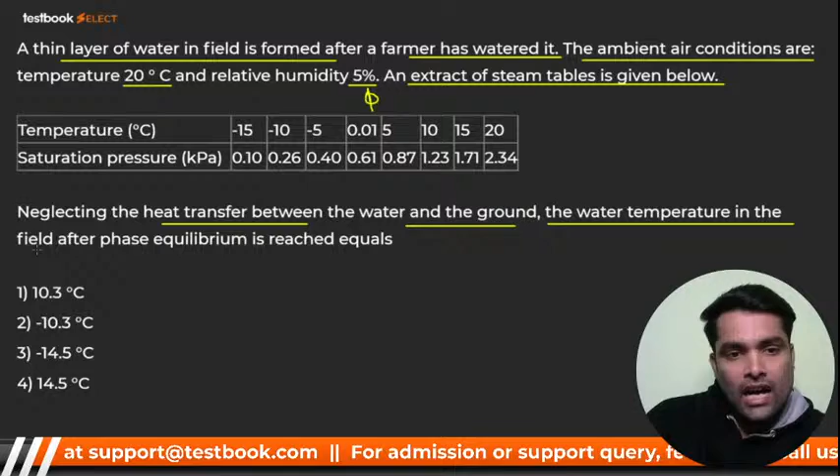Neglecting the heat transfer between water and the ground, which is almost 0, find the water temperature in the field after phase equilibrium is reached. We have to find the temperature corresponding to PV. That means they are asking for the temperature equivalent to the vapor pressure.

Now listen carefully. You know that phi is equal to PV upon PVS, right? So from here you will get PV. Phi is 0.05, PV we have to find out, and PVS corresponds to a temperature of 20 degrees centigrade.

So we look at the table at 20 degrees centigrade, and the corresponding pressure is 2.34 kilopascal. So from here you get PV, and PV becomes 0.117 kilopascal, right? 0.117 kilopascal.

It is 0.117 kilopascal. So here I can write 0.117 kilopascal, right? But if you observe the table, you are getting 0.10, you are getting 0.26, right? Means in between these two values of pressure, we have the value 0.117, and corresponding to that we have to find out temperature. But here they have not given it directly. So what we'll do? We'll do the interpolation.

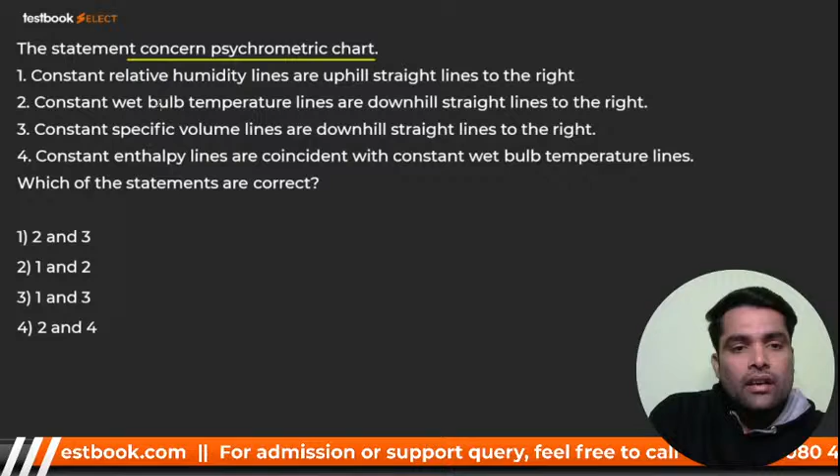The statements concern the psychrometry chart. Constant relative humidity lines are uphill, straight lines to the right. Constant wet bulb temperature lines are downhill, straight lines to the right. Constant specific volume lines are downhill, straight lines to the right. Constant enthalpy lines are coincident with constant wet bulb temperature lines. Which of the statements are correct?

Guys, be fast. कौन सा correct होगा? बच्चा पार्टी, be fast, my dear. Which one is correct? Yes, WBT lines are not coincident, right? Coincide नहीं करती हैं वो. Okay, so my dear, now you tell me.

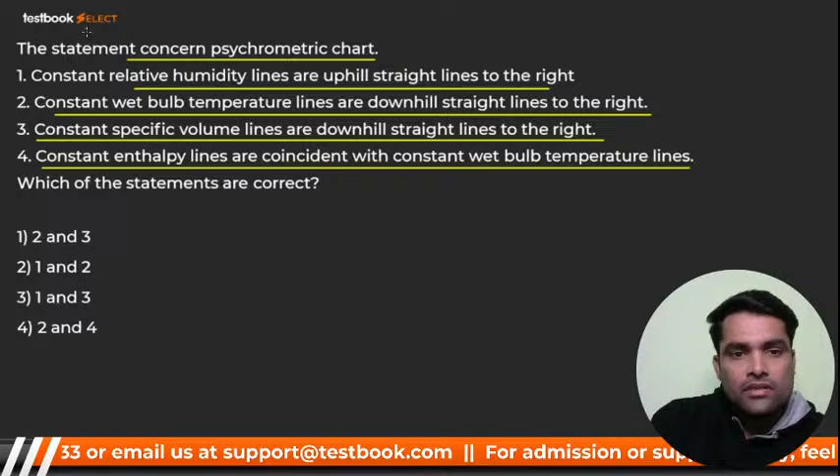Some people have confusion about this line. So I want to tell you, enthalpy lines are uniformly spaced. WBT lines are non-uniformly spaced, so definitely they will not coincide, right? But I can say that constant wet bulb temperature lines are downhill, straight lines to the right. It's correct. This one and this one is correct, my dear. This is nothing but a psychrometry chart, if you remember. 2 and 3.

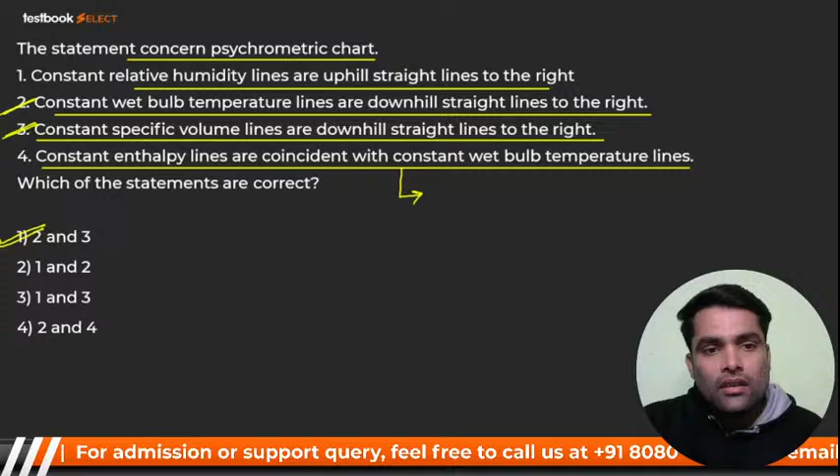No. That's why I say Vamshi Krishna, it's not like that. Krishna, listen to me. Because WBT lines are non-uniformly spaced, whereas enthalpy lines are uniformly spaced, so definitely they will not coincide. So 2 and 3 will be the most correct option, right? I hope you got it. Here I go for next.

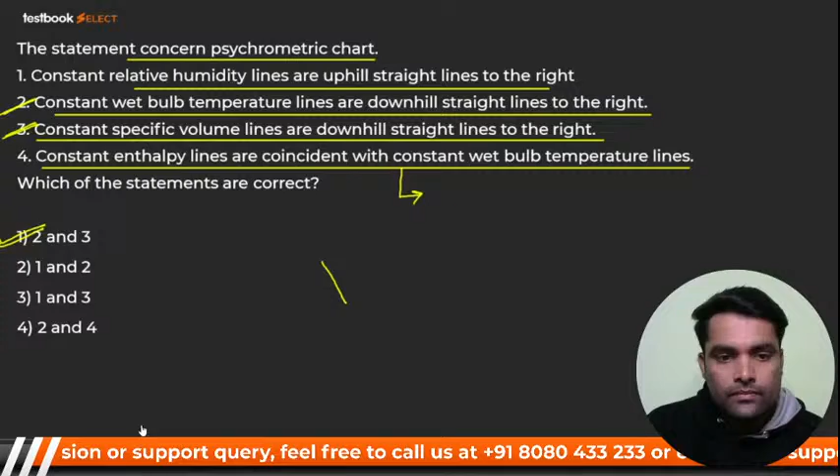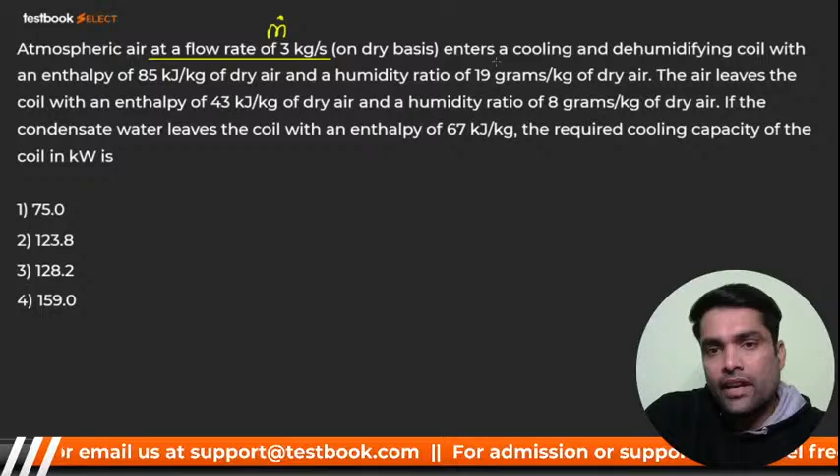Atmospheric air at a flow rate of 3 kg per second, mass flow rate on dry basis, enters a cooling and dehumidifying coil. This is very important. Dehumidifying, right? With an enthalpy at inlet of 85 kilojoule per kg of dry air and humidity ratio 19 gram per kg of dry air. That is omega.

The air leaves the coil with an enthalpy of 43 kilojoule per kg dry air and humidity ratio 8 gram per kg of dry air. The condensate water leaves the coil with enthalpy of 67 kilojoule per kg. The required cooling capacity of the coil in kilowatt is? We have to find out cooling capacity. Guys, yes or no?

Okay, okay, bacha party. So how we can find out? Yes, tell me. Omega 1, you know that, right? Humidity ratio at omega 1 and omega 2 both are given, right? Yes or no? Of course it is given, right? Yes or no, bacha party? Yes, very good. So now how we can find out?

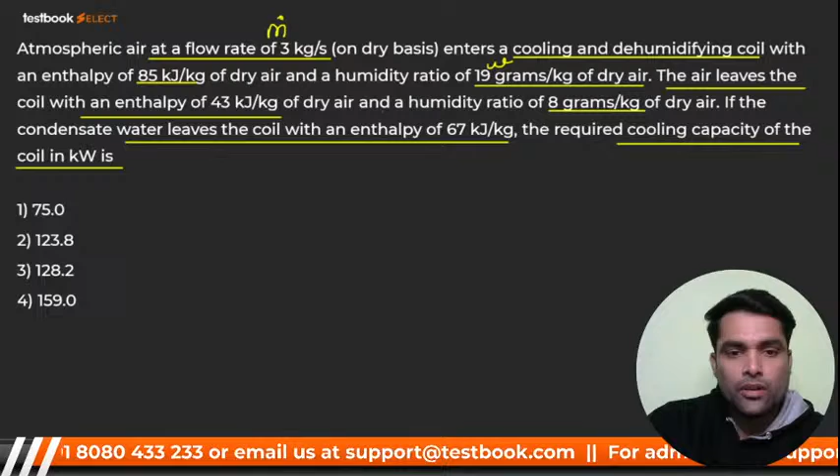Come on, be fast. Be fast, bacha party. Okay, so here listen to me. You know that omega 1 is given. Omega 1, that is 19 gram per kg of dry air. I'm just writing. And omega 2 is what, my dear? Omega 2 is 8 gram per kg of dry air.

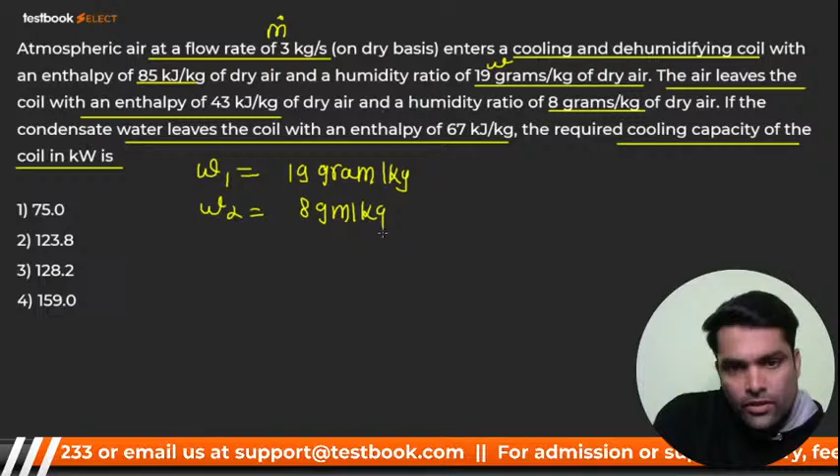Omega 1 is equal to what, bacha? mv1 upon ma. So from here I'll get mv1, and that will be ma into omega 1. Ma is given, it is 3. So it is 3 into omega 1, right? Omega 1 is 19. So it will be 57. 57 into 10 raised to power minus 3.

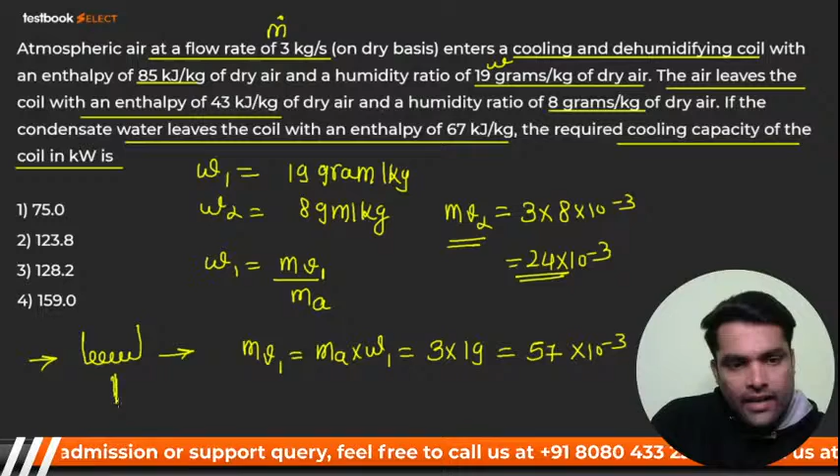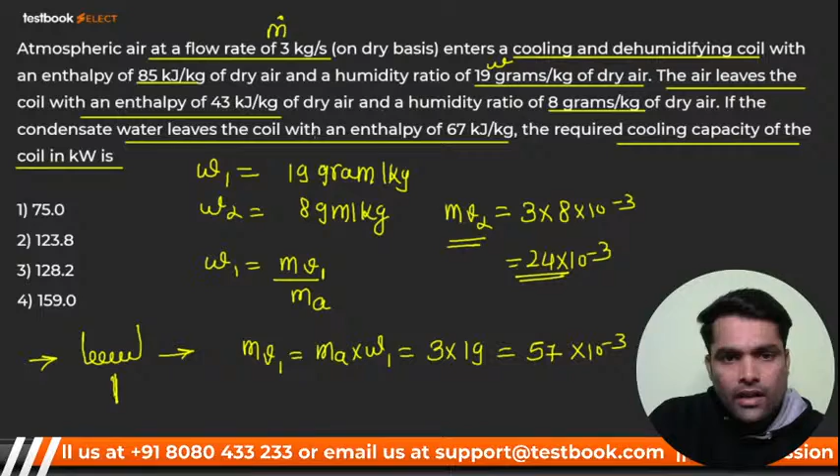So what you'll do is H1 minus H2 multiplied by mass of air, minus enthalpy of water multiplied by mass of water. H1 is 85, H2 is 43, and enthalpy of water is given, that is 67. So 85 minus 43 into mass 3 kg, minus 67 multiplied by 0.033.

How much is it coming, Krishna? It is nothing but 123.8 kilowatt. It's very simple. Krishna, if you have any doubt, then please tell me. Those who have doubts in this session, please tell me if you have any kind of questions. Okay, so I hope you got it. It's a very easy question.

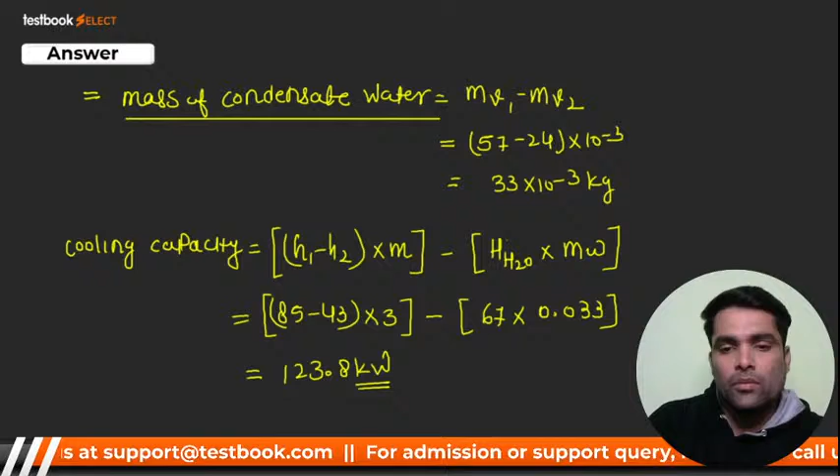Simply, you have to take a difference of the enthalpies multiplied by the mass of the air minus the enthalpy of the water. But here the tricky part is finding out the mass of water, or mass of condensate water. It is the turning point of this numerical. I hope you got it, bacha party. So here I go for next.

Air at atmospheric pressure at a dry bulb temperature of 40 degrees centigrade and wet bulb temperature of 20 degrees centigrade is humidified in an air washer operating with continuous water recirculation. The wet bulb depression, that is the difference between the dry and wet bulb temperature, at the exit is 25% of that at the inlet. The dry bulb temperature at the exit of the air washer is closest to? Again I repeat, they are asking the dry bulb temperature at the exit of the air washer.

So you have to calculate, right? And each and everything is given. See, again, dry bulb temperature is given, wet bulb temperature is given, and the process is what? Humidification, air washer, continuous water circulation; the wet bulb depression, that is the difference at the exit, is 25% that of the inlet. Okay, so they have given. So now guys, we have to calculate. So how can we start the numerical? Yes, bacha party, please tell me.

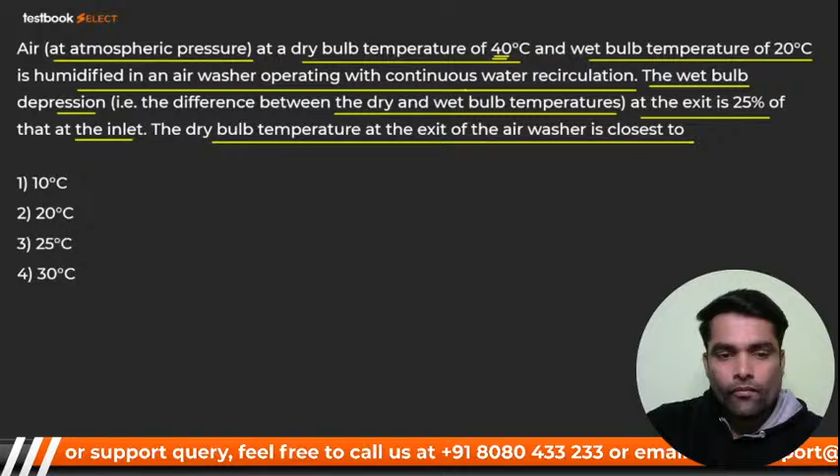Wet bulb depression, right. See, my dear, it's very simple. You know that wet bulb depression is nothing but dry bulb temperature minus wet bulb temperature. So dry bulb temperature minus wet bulb temperature at exit, that is 2, is equal to 25%, means 0.25 of dry bulb temperature minus WBT at 1. Here it is 40. You have to take the difference, so 40 minus 20.

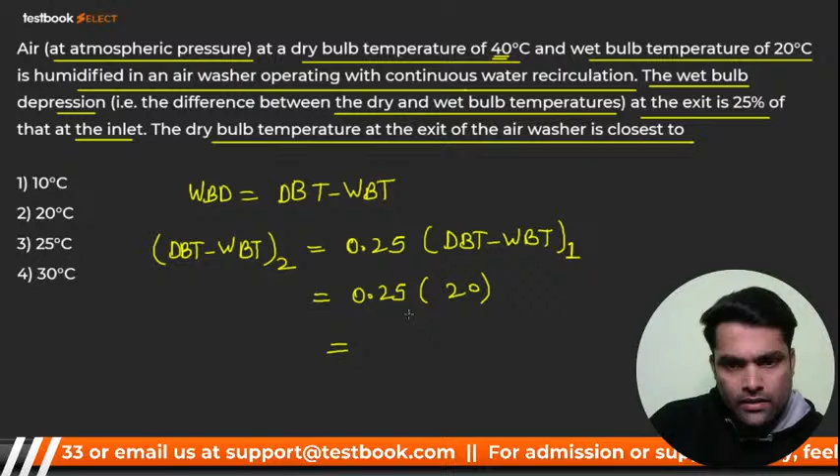0.25 multiplied by that is 4? No, it's not 4, I think it's 5. So DBT minus WBT at 2 is 5. Now, you know that wet bulb temperature is given, that is 20. So definitely dry bulb temperature at exit will be 20 plus 5, and that will be 25 degrees Celsius.

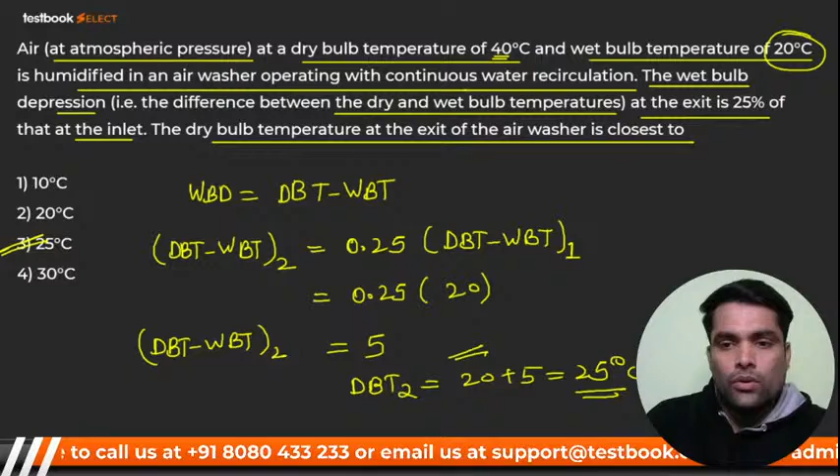See how simple this is. This is a very simple question, and it has been asked in the GATE examination. And the correct option will be number 3. I hope you got it. Yes, Krishna, I hope you got it. Those who are watching, you can see it is a very simple question; you simply try to understand the meaning, and then apply that particular funda to that particular condition. So here I go for next.

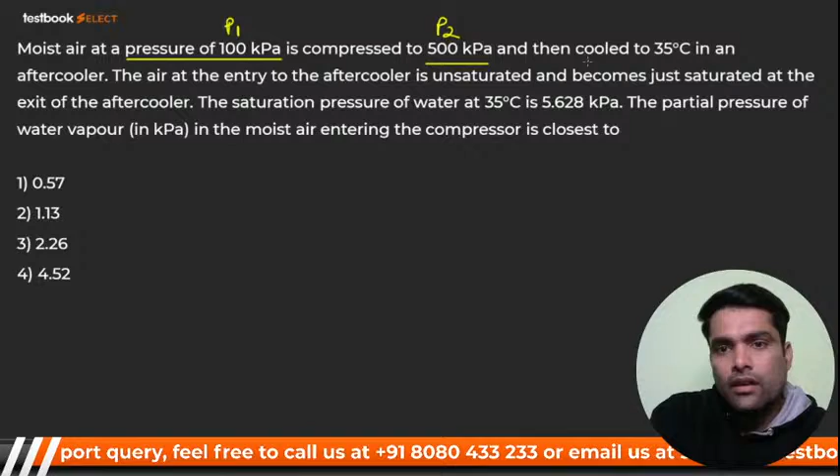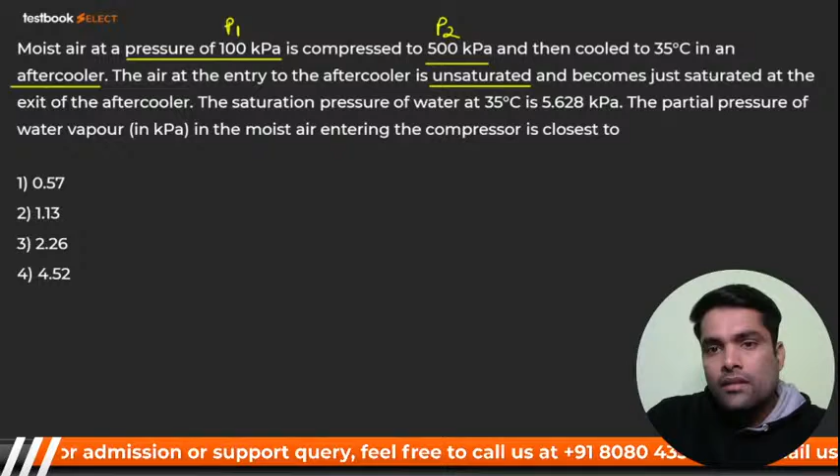Moist air at a pressure of 100 kilopascal is compressed to 500, that is P1 is this, P2 is this. Then cooled to 35 degrees centigrade in an after cooler. The air at the entry of the after cooler is unsaturated, that means relative humidity is less than 100, and becomes saturated at the exit of the after cooler, that is relative humidity phi is equal to 100%. The saturation pressure of water at 35 degrees centigrade is this much. The partial pressure of water vapor in the moist air entering the compressor is closest to; they are asking PV.

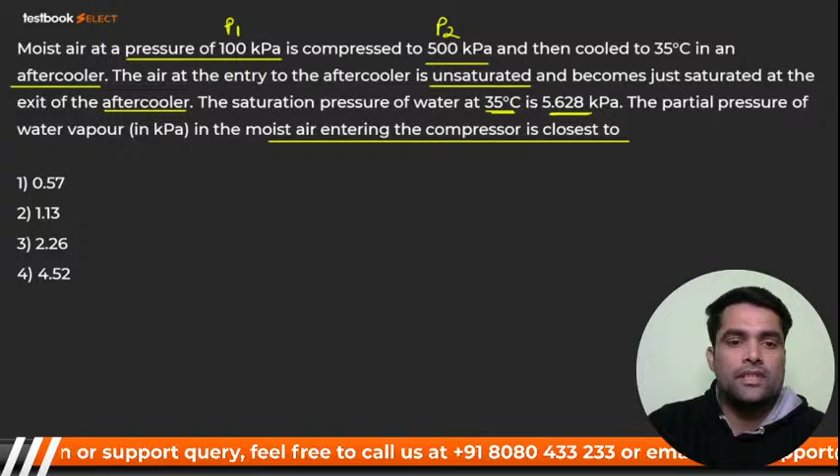Bacha party, we have to calculate PV. Now how can we proceed, how can we start the numerical? Saturated means PV is equal to PVS, right? Yes or no? So PV will be 5.628. Yes or no, bacha party? Please calculate each and everything.

So guys, now we'll proceed. So here we go, my dear. Can we go ahead? Okay. Very good, Sam. Very good.

See, my dear, what did they say? Just saturated at the exit. That means PV by PVS is equal to 1, that is phi. PVS is given, so I can say that PV is 5.628. The partial pressure of water vapor in the moist air entering the compressor is closest to.

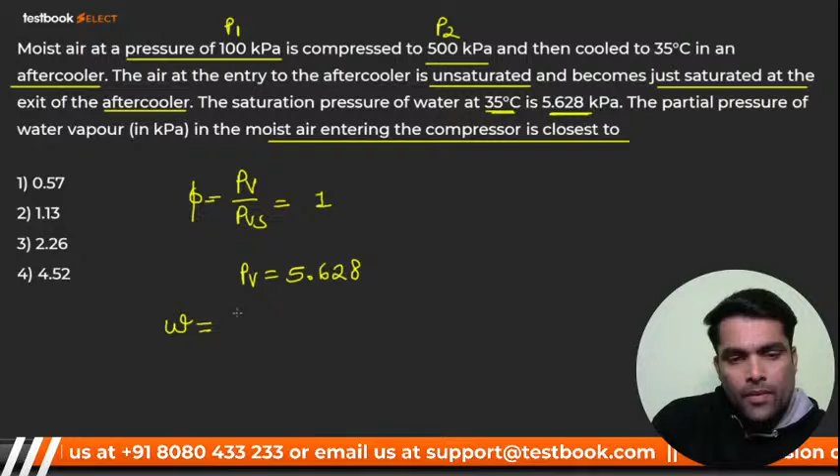My dear, omega will be 0.622 PV upon P minus PV. So it is 0.622 times 5.628 divided by, what will we take here, bacha party? 100 kilopascal is given. So from here you will get omega, and this omega will come around 7.0809.

7.0809 into 10 raised to power minus 3 kg of vapor per kg of dry air, right? This will be omega. Am I right now? But I want to tell you one thing. See, the air at the entry of after cooler is unsaturated and becomes just saturated at the exit of cooler. The saturation pressure is given. Now we have to find out the exit. At the exit we have to find out this one. So omega will remain same. Omega will remain same, right?

Yes. So my dear, see what I'll do now. If it is same, then again I'll write the equation: omega is equal to 0.622 PV upon P minus PV. Right? Anybody having doubts? No doubts. Very good. So guys, we have already this value, 7.0809 into 10 raised to power minus 3, equals 0.622 PV divided by 100 minus PV. PV we have to find out.

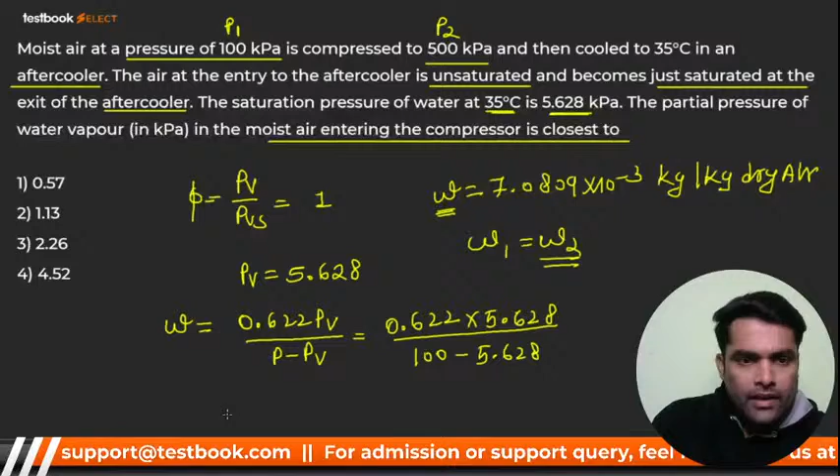So my dear, from here you will get PV, and how much is PV coming? PV will be 1.125. PV is equal to 1.125 kilopascal. So option will be, my dear, 1.12. That means this one, nearest option, number 2. Okay, everybody, you got it? Yes, Krishna, Sam. Guys, had you got it? Yes, very good. It's very easy question.

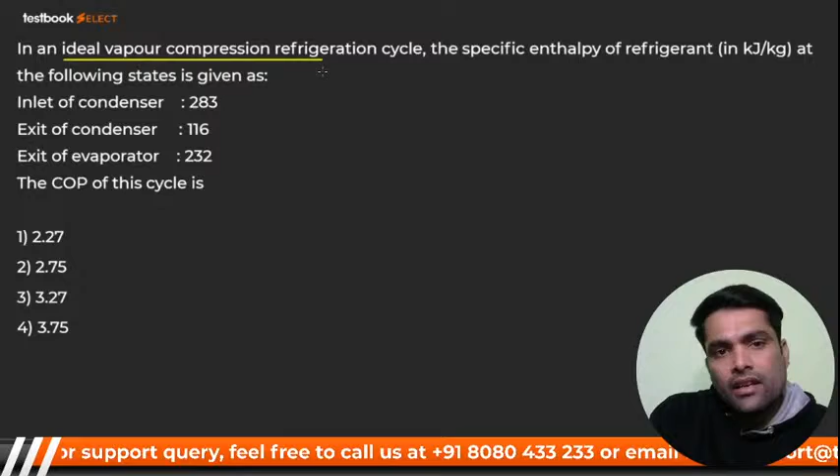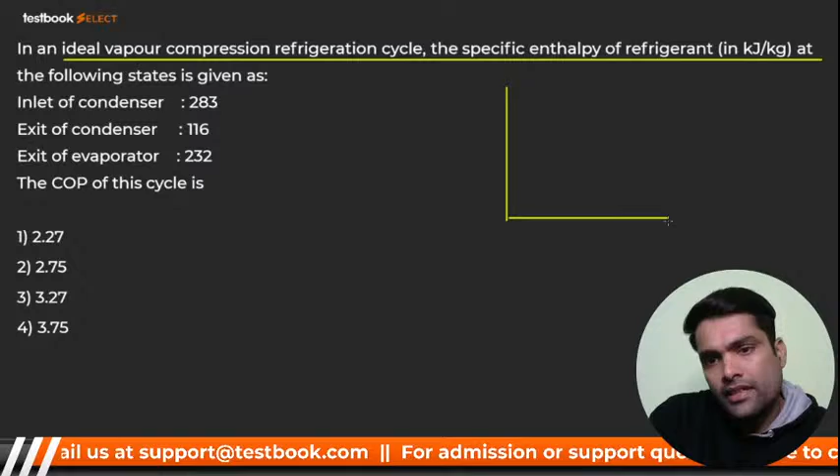Now we are going to another one. In an ideal vapor compression refrigeration cycle, specific enthalpy of refrigerant in the following state is given. This is our TS diagram. I'm just drawing the diagram for your understanding, otherwise there is no need to draw it. In the examination, don't draw the diagram. Your preparation should be at such a level that there is no need to draw the diagram. That will save your time for this kind of questions.

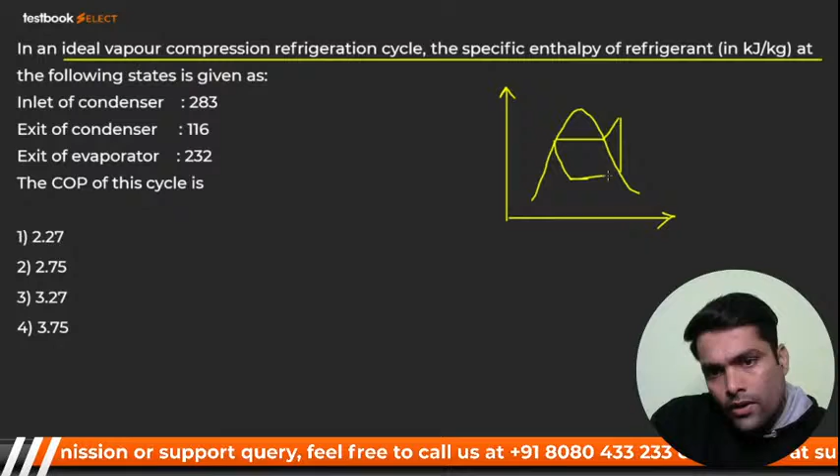If you're not able to handle this kind of question without detailed analysis, my dear, then you have to think where your preparation is. Where is your preparation? Okay, so it should be 1, 2, 3, 4. Inlet of condenser, that is H2, is given 283 kilojoule per kg. Exit of condenser is H3, and 3-4 is an isenthalpic process, so H3 is equal to H4, that is 116 kilojoule per kg. Exit of evaporator, that is H1, is 232.

Now COP: refrigeration effect is H1 minus H4 divided by work required for compression of the refrigerant, which in this diagram is H2 minus H1. So now you put the values, that is 232 minus 116, divided by 283 minus 232. So from here you'll get COP, and COP will be 2.27.

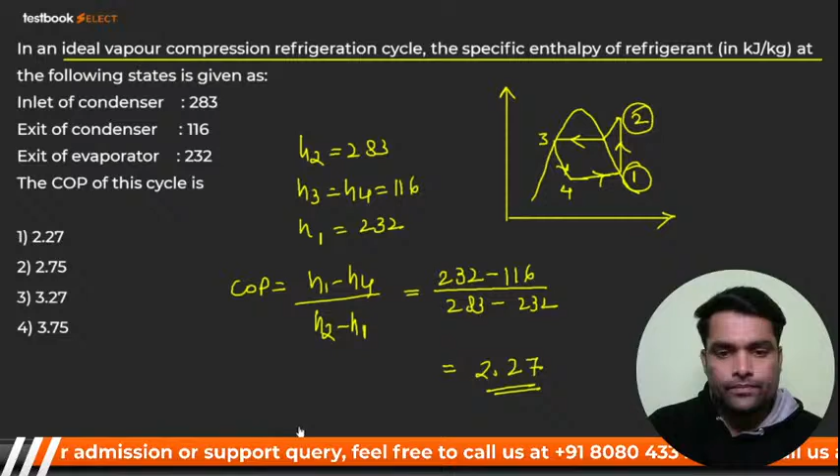How much is it coming? 2.27, right? Very good. It is 2.27, and this will be your answer. Okay, I hope you got it. Very good, Krishna, you have calculated. Now I'll go for next. Here is another question. Yes, everything is clear now.

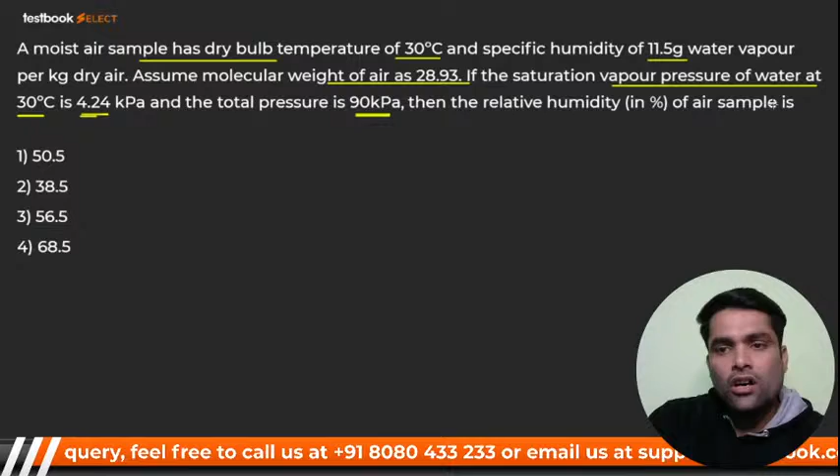Moist air sample has dry bulb temperature 30 degrees centigrade. Specific humidity is 11.5 gram of water vapor per kg of dry air. Assume molecular weight of air 28.93. If the saturation vapor pressure of the water at 30 degrees centigrade is 4.24 and the total pressure is 90 kilopascal, then the relative humidity of air sample is? Relative humidity we have to find out.

That means we have to find out phi. So how can we find it? It is PV by PVS, right? Yes or no? So we have to find out PV first. Once we get the PV, we can get anything. So here I go. Phi is equal to PV by PVS. We know PVS, but we don't know PV.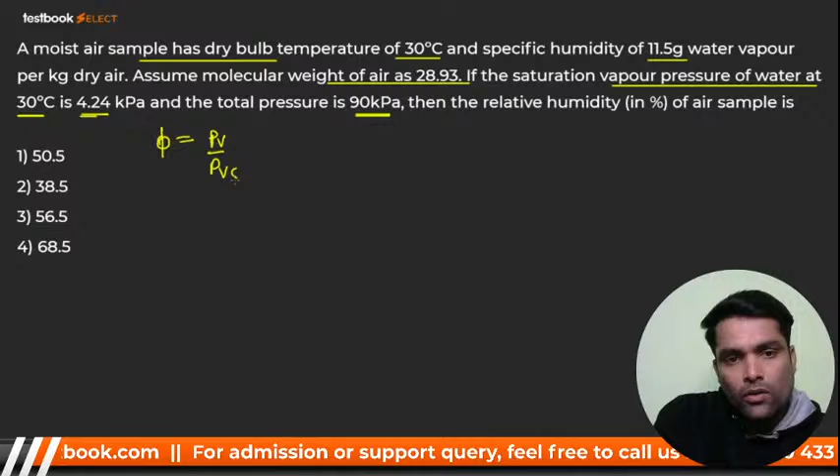So omega is 0.622 PV divided by P minus PV. So it should be 0.622 PV, and total pressure, how much is it? How much will we take? 90 kilopascal is given, I think. Right, 90 kilopascal. We can take 90. Okay, so here.

Okay bacha party, 90 minus PV. Okay, and it is what? It is in, we have to put the value in kg. So it should be 11.5 into 10 raised to power minus 3 kg of vapor per kg of dry air. I hope you got it, yes or no? Here they have made total pressure 90 kilopascal. So my dear, from here you'll get PV.

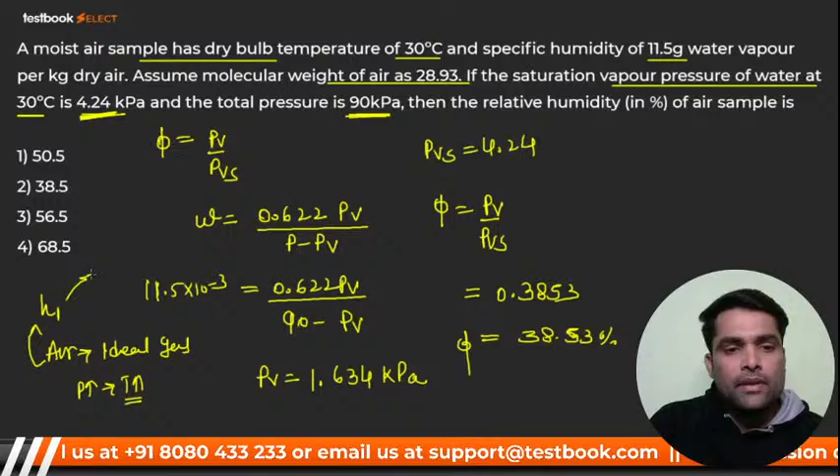So if you are compressing air, how much air you have compressed will depend, because if pressure increases, temperature also increases, right? So if pressure increases, temperature also increases, my dear, so definitely the heat content will increase, and we are taking this work in terms of enthalpy, because enthalpy is nothing but what? For ideal gas it is nothing but CP T1, it is basic thermodynamics we have already studied, CP T1, and we are putting this value, that is T1 minus T2, right? I hope you got it.

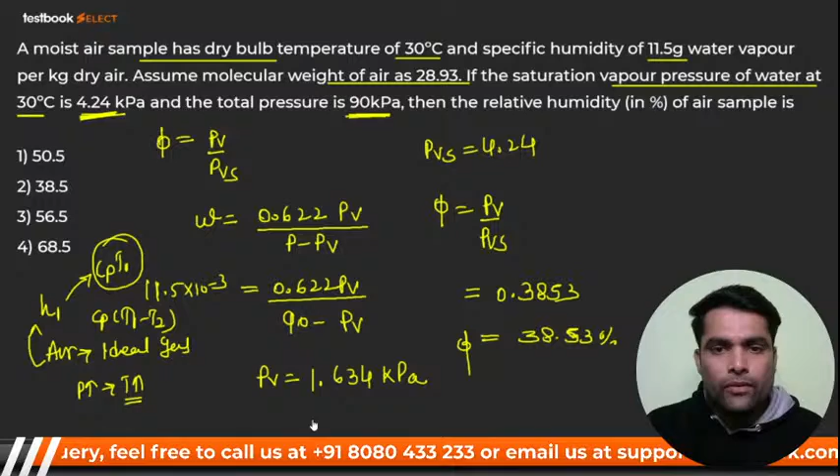Sam, I hope you got it, bacha. Okay, wait for your comment, mate. Okay, so here I go for next.

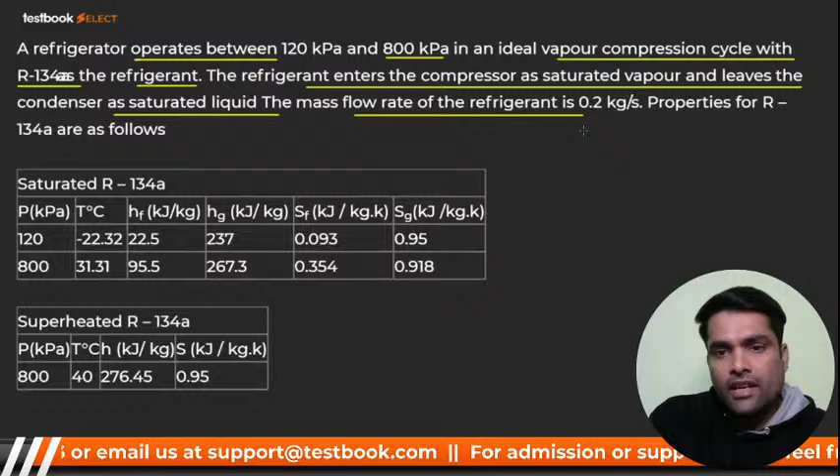See, a refrigerator operates between 120 kilopascal and 800 kilopascal in an ideal vapor compression cycle with R134a. There is no chlorine in the R134a. The refrigerant enters the compressor as saturated vapor and leaves the condenser as liquid. The mass flow rate of the refrigerant is given, that is MR, mass flow rate of refrigerant, is 0.2 kg per second.

Okay, properties for R134A are as follows. The properties have been given: enthalpy of vapor, enthalpy of liquid, entropy of vapor and liquid, both are given, as well as they have given the superheated condition as well, right? Okay, so we can see that they have given the condition for the superheated, and they have given the condition for all the things.

But what they are asking, see the next slide. So they are asking the rate at which the heat is extracted in kilojoule per second from refrigerated space. That is what they are actually asking for, refrigeration effect. The language is twisted in such a way that whatever the amount of heat you are removing from a particular space, that is nothing but you are producing that much amount of refrigeration effect, or you can say cooling effect in that particular space.

Suppose this is a room, okay, and if you are removing suppose 10 kilowatt of heat from here, so my dear, it is nothing but your refrigeration effect, because this is going to be a load on the refrigerator, right? And the refrigerator had to remove the 10 kilowatt heat from this space. So my dear, this 10 kilowatt will become our refrigeration effect. I hope you got the concept of the refrigeration effect, my dear.

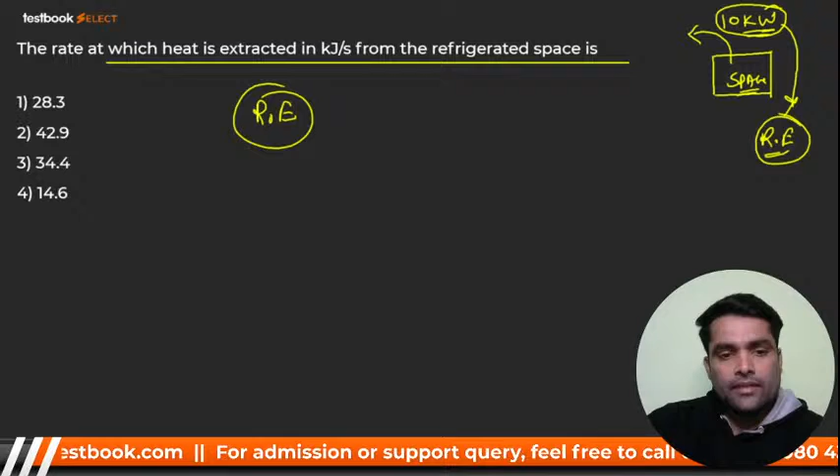Okay, does this make sense? So my dear, now we can calculate. So how we can calculate? Yes bacha, it is nothing but H1 minus H4. What will it be bacha? It should be H1 minus H4. So you know that H1 is nothing but, what would H1 be? And what should be the H4? What should be H4 and what should be H1? Yes, bacha party.

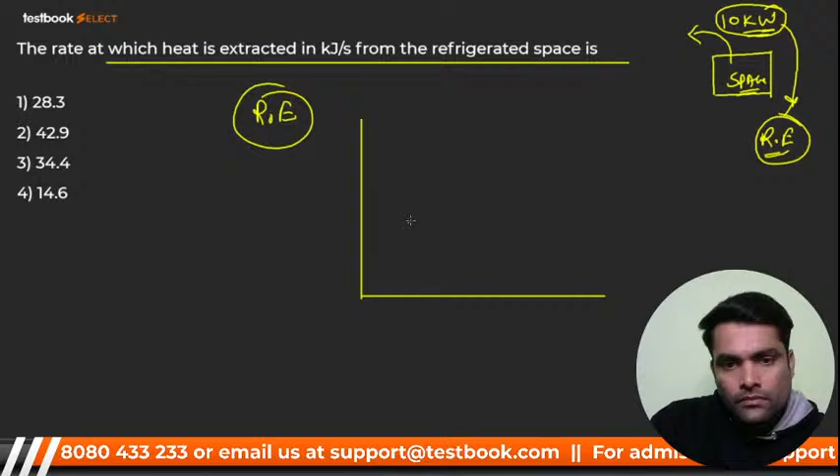Guys, be fast. Somebody is answering, be fast. Okay, I'll tell you how to solve this. Some people get confused about how to solve this. I'll tell you, just keep an eye on the screen, my dear. Watch carefully, otherwise nothing will make sense and you'll get confused.

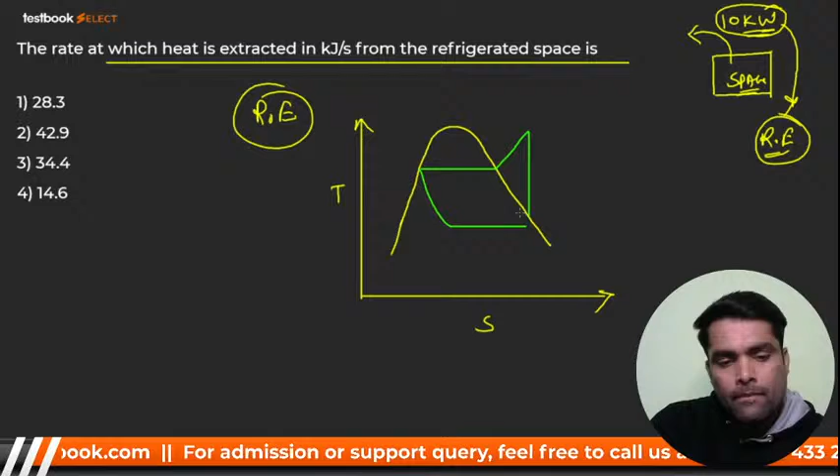Okay, 1 2 3 4. You know that H3 is equal to H4, and H1 is equal to Hg at evaporator pressure, right? H3 is equal to H4 is nothing but what? It is Hf at condenser pressure, right? So if I see the chart...

You know that the refrigerator is operating between 120 kilopascal and 800 kilopascal. So definitely the 800 kilopascal pressure will be the pressure of condenser, right? So this will be condenser pressure, this will be evaporator pressure. So definitely it is 800, and it is... let me check... it is 120, sorry, it is 120.

So what you are getting is H3 is equal to H4 is equal to Hf, right now at condenser pressure. Condenser pressure means 800 kilopascal, so it should be 800 kilopascal. It is 95.5, what did it become? 95.5 kilojoule per kg.

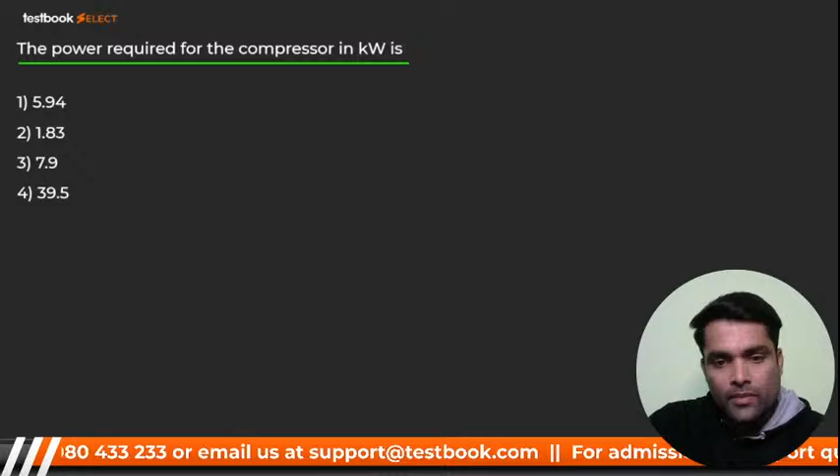The power required for compressor in kilowatt. Now we have to find out power required for compressor in kilowatt. How can we calculate? For the same figure, the same question, power required for compressor is H2 minus H1. It will be mass flow rate multiplied by H2 minus H1, because this is H2, and it is superheated, right? So what is the value at superheated?

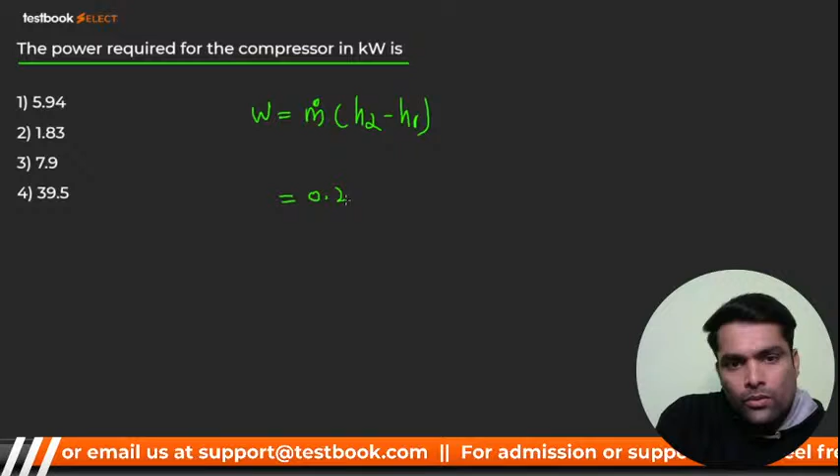Let me check, enthalpy 276.45, right? So it is 0.2 multiplied by 276.45 minus H1. H1 is how much? H1 is Hg, that is at 120, that is 237, right?

So what will be the answer? The answer will be... what will be the answer? The answer will be 7.9 kilowatts. It is what?

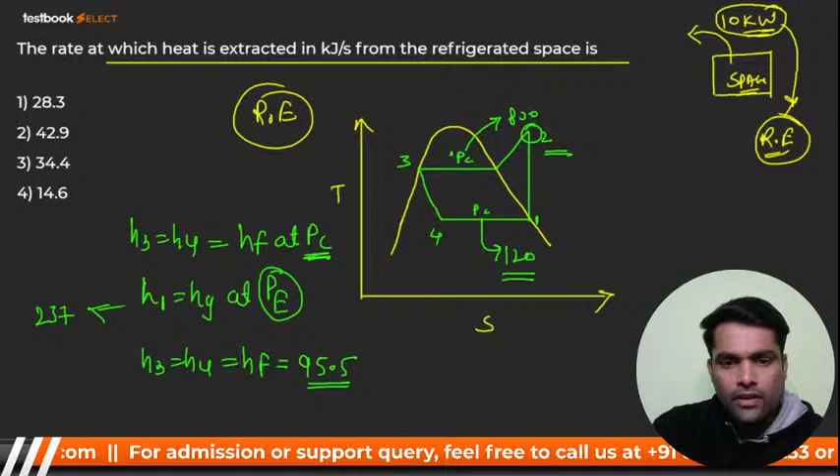H1 is how much? Let me check. We have H2 minus H1. So H1, no, H1 is a different thing, right? H1 is 237, right? 237 is it? I hope you got it. Yes, H1 is... no, it's 237, right, okay. So wait, let me check once again. H1 means Hg, Hg at 120, that is 237, right?

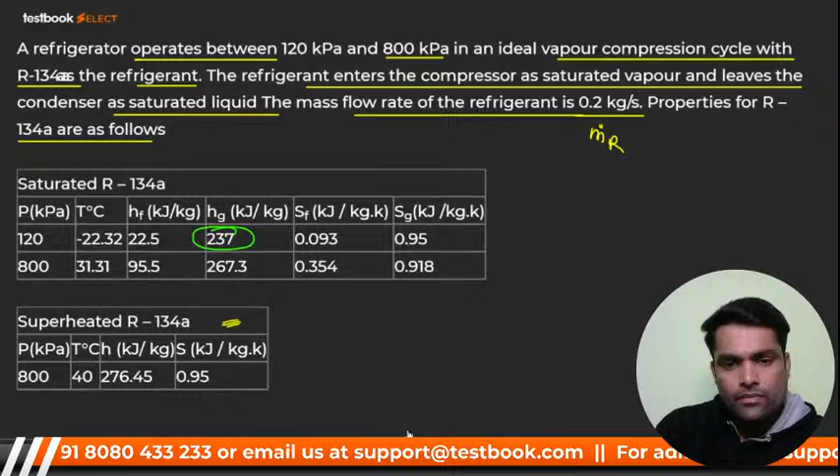Very good, so here we go. So it is how much? How much is it coming to? Let me check once again. That is 237 minus 95.5 multiplied by 0.2. It's correct, 28.3 kilowatt, right.

So what about this one? 276.45 minus 237 multiplied by 0.2, that is 7.89 kilowatt. So it should be 7.9. Okay, I hope you got it, everybody.

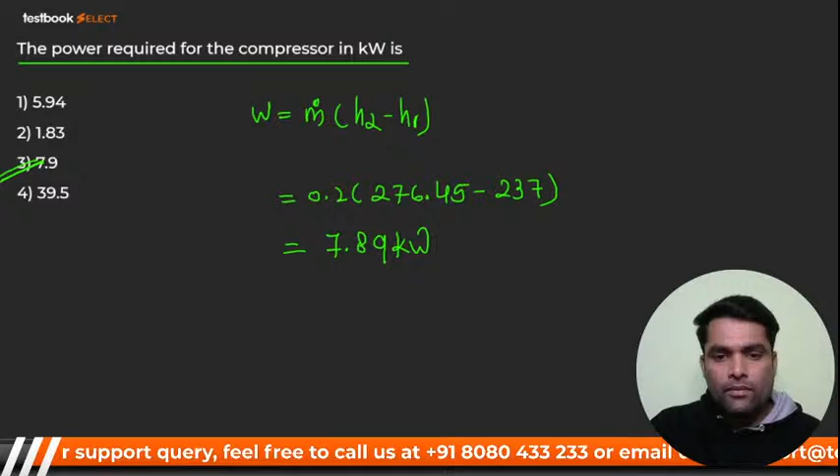Here we go for the next one, let's move forward.

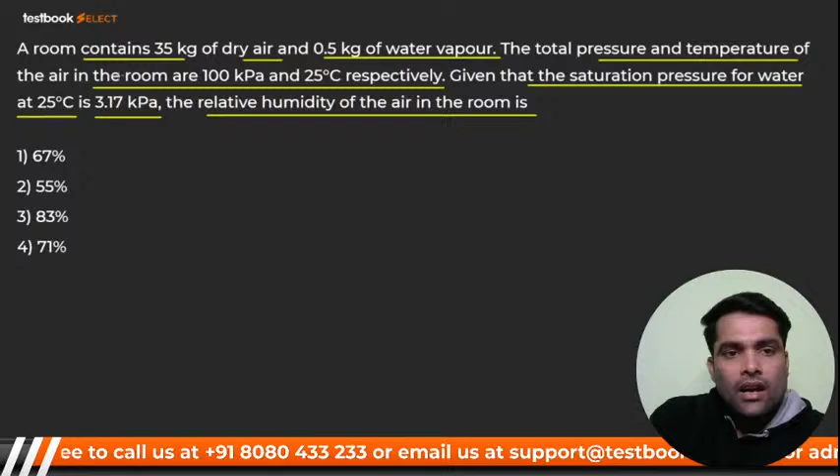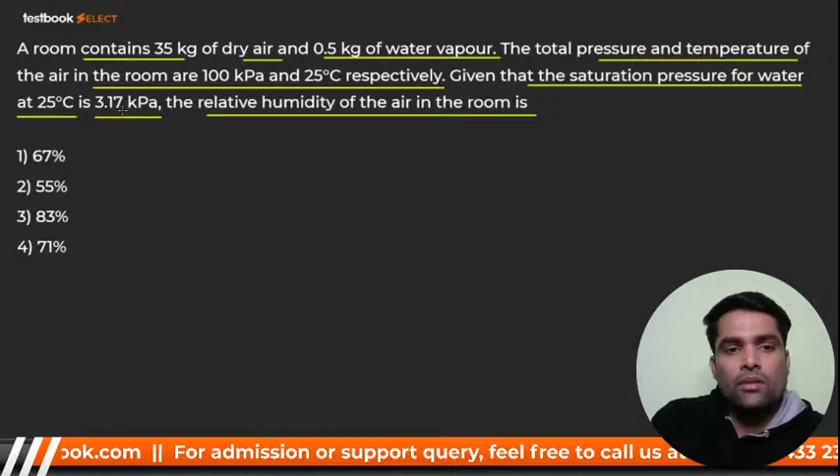The relative humidity of the air in the room is, let me repeat the question, listen carefully. Room contains 35 kg of dry air and 0.5 kg of water vapor. The pressure and temperature of the air is given, that is 100 kilopascal and 25 degrees centigrade. Given that the saturation pressure of water at 25 degrees centigrade, Pvs, is given as 3.17. And now they are asking to find out phi. What should be the phi?

What should be the phi? That we have to find out. So guys, how can we find out? Simply, first you have to calculate MV by MA.

First you shall calculate omega, that is 0.622 PV upon P minus PV. If PV is found from here, I'll get it. Omega is MV by MA. MV is given as 0.5, divided by 35, so I think it's 1 by 70. So I'll put the value, 1 by 70 is equal to 0.622 PV divided by total P.

Total P is 100 minus PV. From here I'll get PV, and PV will come around 2.253. Kitna aa raha hai? 2.253, right? So it is 2.253.

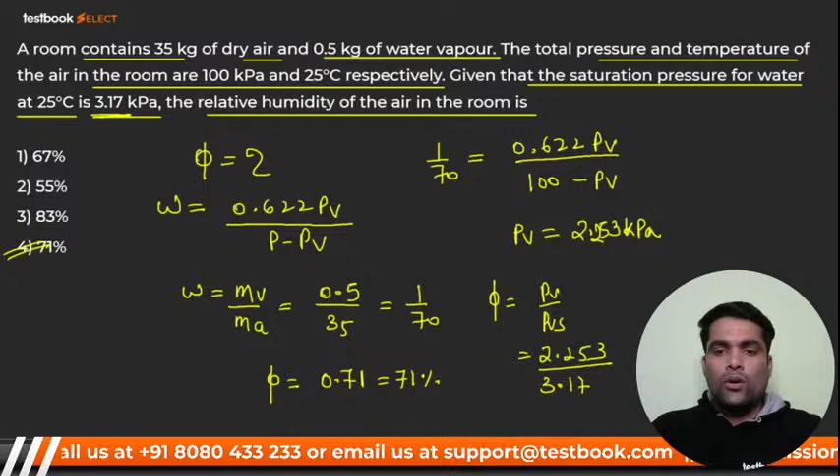Fourth one. Okay, I hope you got it. Guys, do you follow me? Please try to follow, please try to get each and everything. See how I approach the numerical. Thermal science is a very easy part, and it carries around 20 to 25 marks in your examination. I hope you got it.

Okay, so here I go for next. Chale aage, here I go for next.

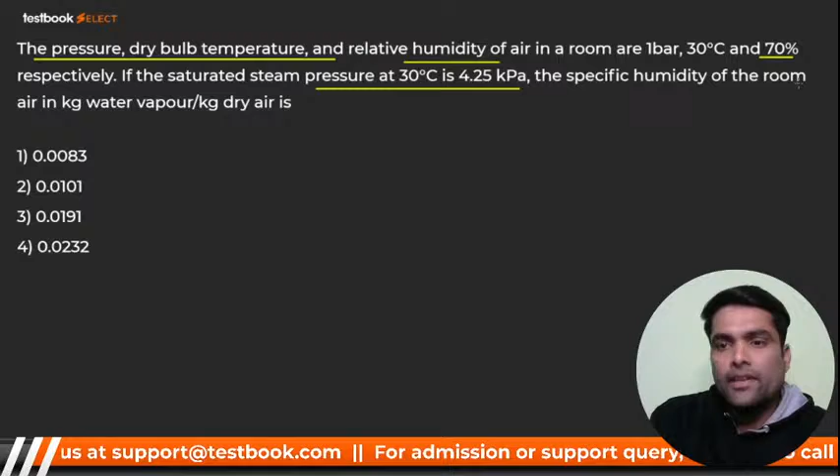Now the next numerical. The pressure, dry bulb temperature and relative humidity phi are 1 bar, 30, and 70%. If the saturated steam pressure at 30 is given, PVS is 4.25, find the specific humidity of the room air in kg per kg of dry air. We have to find out omega, and you know omega is nothing but 0.622 PV upon PVS.

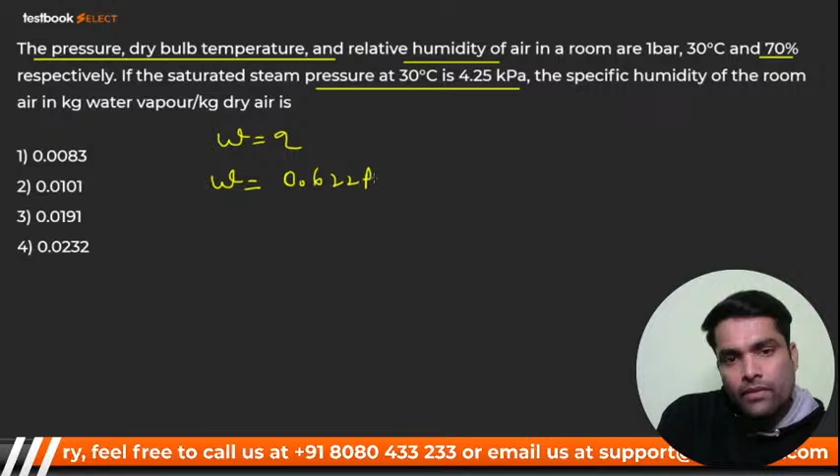You know phi is given, that is 0.7, and it is nothing but PV upon PVS. It is not this one. Sorry, it's not PVS, it's P minus PV. I'm very sorry, that was written in a hurry. So phi, 0.7, is PV upon PVS, as I already explained, with PVS given.

From here you'll get PV. What should PV be? PV will be 2.975. It's a very easy question, it is 2.975. PVS is given in the question as 4.25, so you'll get this one, right?

If you got PV, you can put the value in omega equals 0.622 PV divided by total pressure. Let me check, it is not given. That means we have to take total pressure as 100 minus PV. PV is 2.975. So from here you'll get the answer, and your answer will be 0.019.

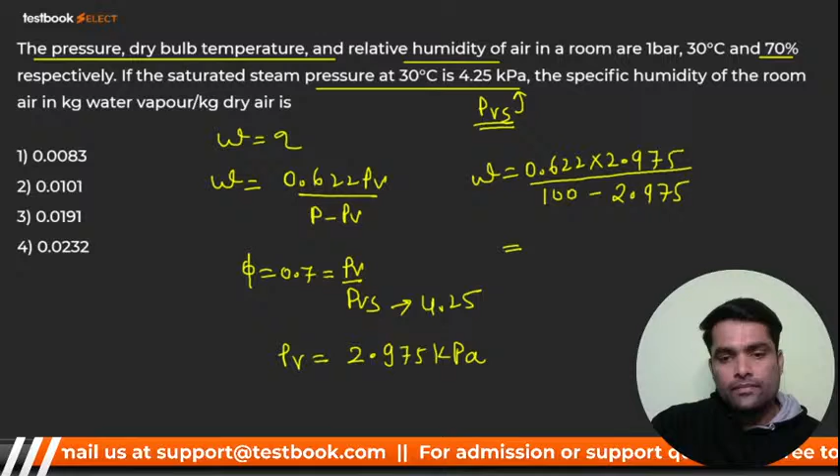It is 0.019 kg per kg of dry air.

Check all the questions, they're coming out easy. Every question is quite easy, but if you don't know the funda, nothing is tougher than this in the world—if you don't know the concept, nothing in life can be harder. See how much I have to write, only 2-3 lines, and I'll get 1 mark in the GATE examination. And 1 mark means you are ahead of 1,000 people.

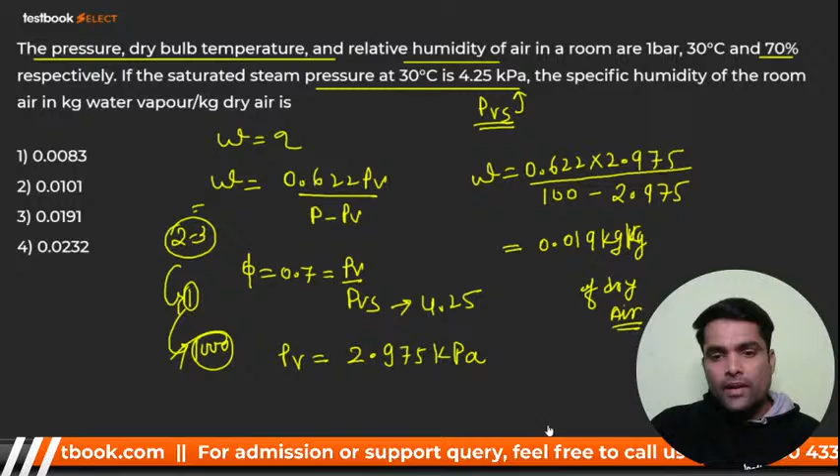Okay. Very good, Sagar. That's very good, dear. We have already started, that is GATE series, right? So my dear, we'll go for next. Chale aage question pe. This is another question. See, my dear.

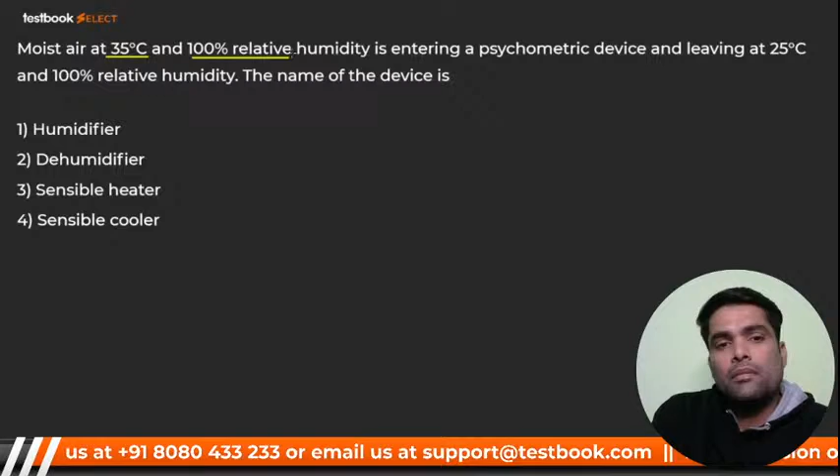Moist air having dry bulb temperature 35, relative humidity 100%, that is dry bulb is equal to wet bulb is equal to DPT. 100% means dry bulb temperature is equal to wet bulb temperature is equal to dew point temperature. Humid air is entering a psychrometric device and leaving at 25 and 100% relative humidity. The name of the device is, वो device कौन सा होगा बच्चा? Please tell me. The temperature has been reduced. Please keep in mind.

Yes, bacha. What it should be? Dehumidifier, sensible cooling, sensible heating. What it should be? Guys, which one? Very good, very good, Sagar, Sam, everybody. Yes, very good, dear. I appreciate.

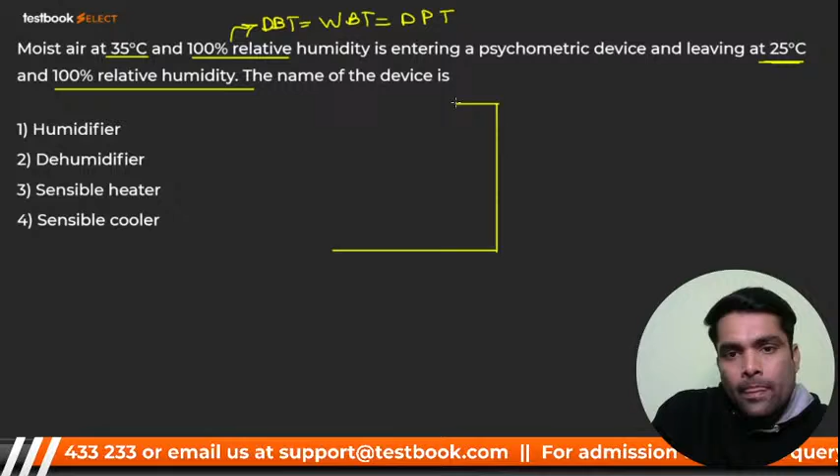See, क्या हो रहा होगा? I'll tell you. I'll show in the chart. You know that this is relative humidity line, so it is 100%. यही होता है 100%. And see, relative humidity remains 100%, right? But the dry bulb temperature is decreasing. Dry bulb temperature has been decreased from 35 to 25, right?

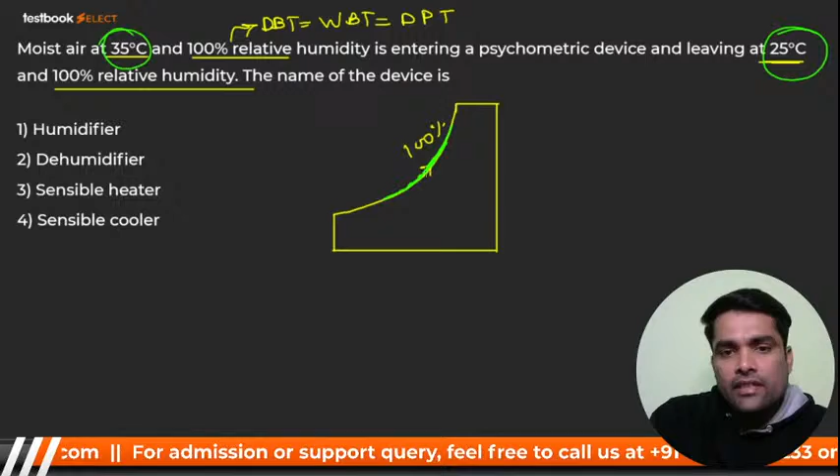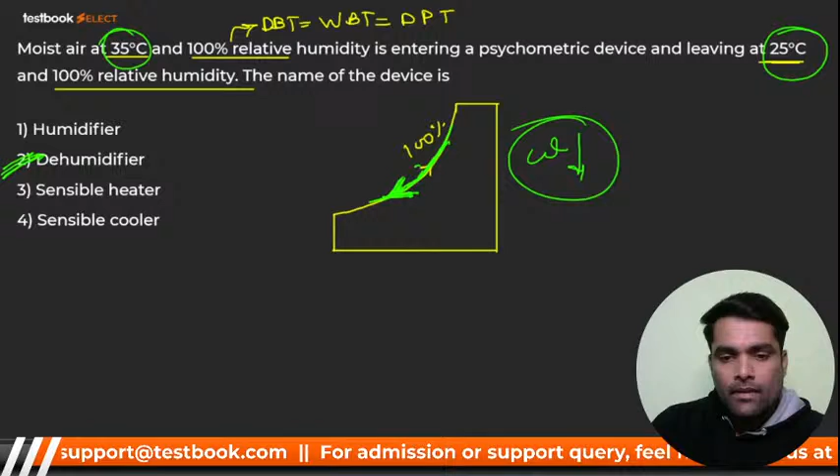And see, in this process, what happened? Relative humidity remains same ना, right? And उसका क्या हो रहा है? जो ओमेगा है वो चेंज हो रहा है. It has been dropping. So it is none other than dehumidification. That is removal of moisture. Okay, I hope you got it, बच्चा party. Very good.

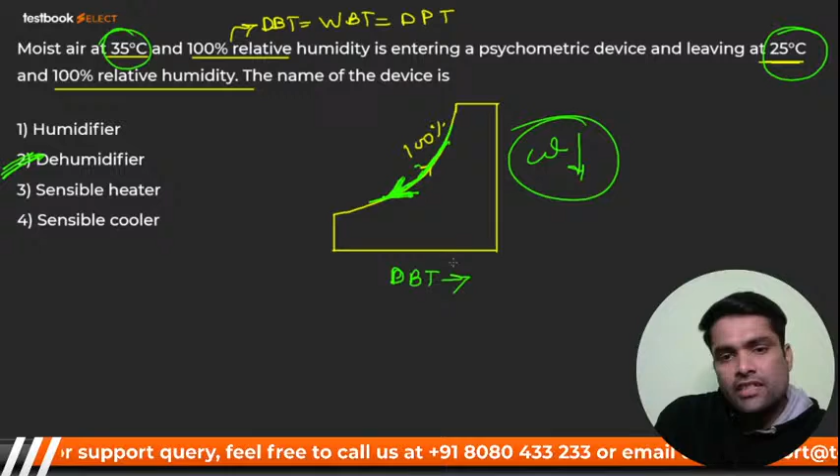Nah, it's not sensible cooling. If you are doing sensible cooling, your omega will remain constant and your dry bulb temperature is going to decrease. Sam, I hope you got it, bacha. Here it is dry bulb temperature, right? It is increasing in this direction. So your cooling will be in this process. That is 1 to 2 is nothing but sensible cooling.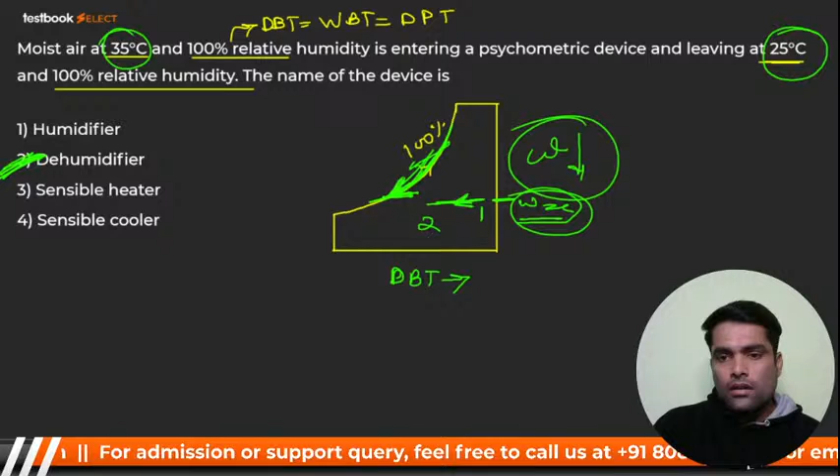And my dear, your omega will remain same. It will not change. But here the omega is going to change, and that is none other than what? Dehumidifier. Okay, no issue. Here I go for next.

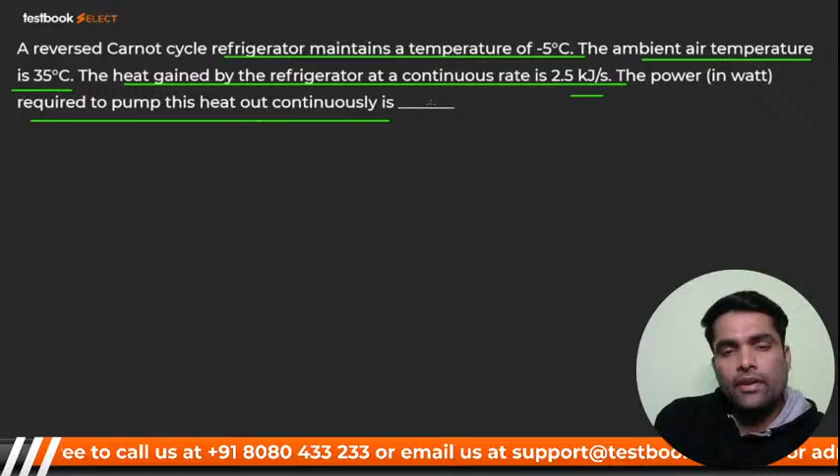Next question. A reversed Carnot cycle refrigerator maintains a temperature of -5 degrees centigrade. The ambient air temperature is 35 degrees centigrade. The heat gained by the refrigerator at a continuous rate is 2.5 kilojoule per second. The power in watt required to pump the heat out continuously. We have to find out power. Carnot refrigerator is operating at -5 and ambient temperature 35.

35 plus 273. What it should be, bacha? 308. Yes, it's 308 हो गया. ये कितना हो जाएगा? Minus 5 plus 273 is 268 Kelvin, right? So see, COP of heat pump is nothing but TH. TH is 308, divided by TH minus T naught, that is 40. 40 का ही तो difference है.

What you are getting, बच्चा party? Very good. कितना आ रहा है? जितना भी आ रहा हो यहां से कैलकुलेट कर सकते हैं आप. Very good. It's 7.7. And you know that COP is also equal to heating effect, QH divided by W. Right? And here they have said the heat gain by refrigerator at continuous rate of 2.5. Reverse Carnot refrigerator cycle बोला है. हमने heat pump निकाल दिया.

Sorry. The power required. Oh, sorry. I have given for heat pump. It is not pump. अरे रेफ्रिजरेटर निकालना है बच्चा. So COP is nothing but 268 divided by 308 minus 268. ये किसके बराबर होता है? That is refrigeration effect divided by W. यहां से आपका W आ जाता. Equate कर दिया directly. Misinterpret कर गए थे हम question को. I am very sorry for that.

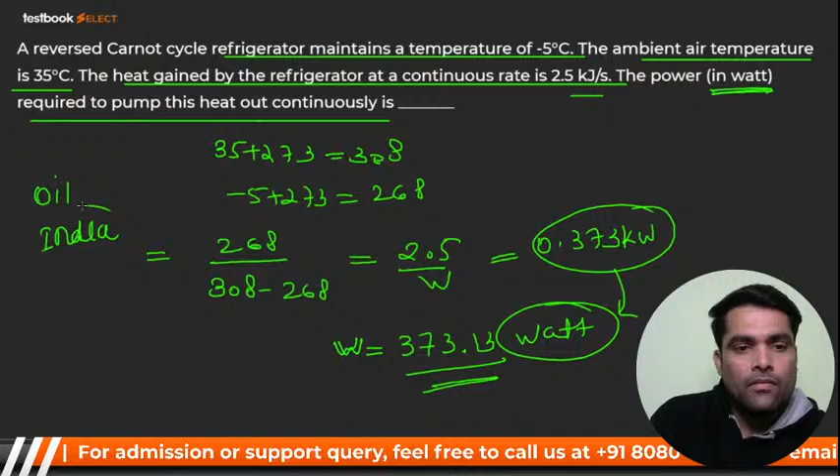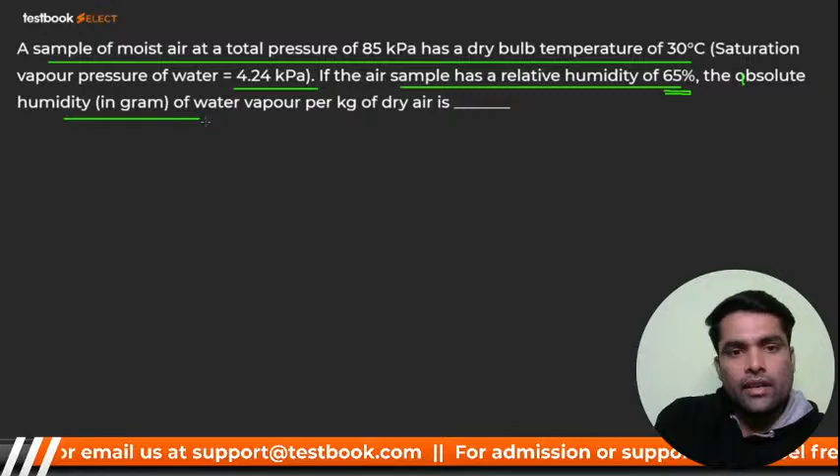A sample of moist air at total pressure of 85 kilopascal has dry bulb temperature of 30, saturation vapor pressure of water 4.24 kilopascal. If the air sample has a relative humidity of 65%, the absolute humidity in gram of water, that is we have to calculate omega. Omega calculate करनी है हमें, how we can

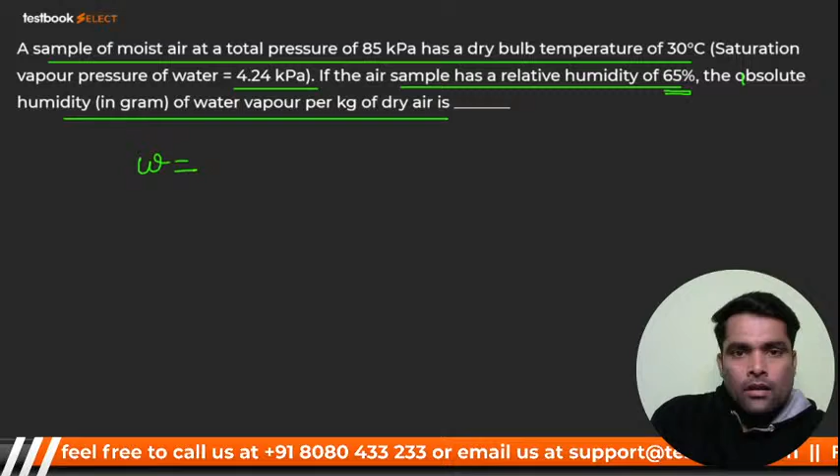Phi is given, ये कैलकुलेट करना है. Phi is what my dear, PV upon PVS, right. Phi given 0.65, that is 0.65 multiplied by PVS, PVS is saturation pressure of 4.24, is equal to PV, so PV यहाँ से आ जाएगा 2.75 kilopascal. If I got this one my dear, I can put the value, that is 0.622 into... see these are the questions from gate examination, these are very simple questions my dear, and total pressure कितना दिया हुआ है 85.

They have asked absolute humidity in gram, please remember gram में बोला है. You are going to get in kg, right. आपको मिलेगा 0.0208 kg per kg of dry air, ये कितना हो जाएगा 20.8 gram per kg, right, so 20.8 will be the required answer.

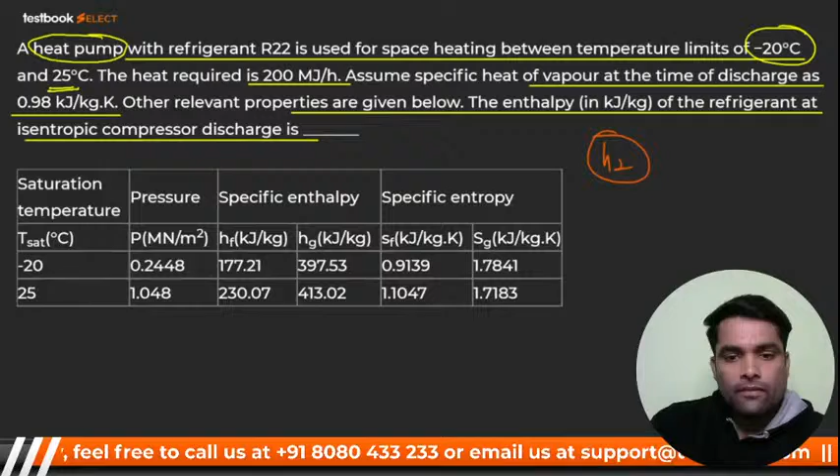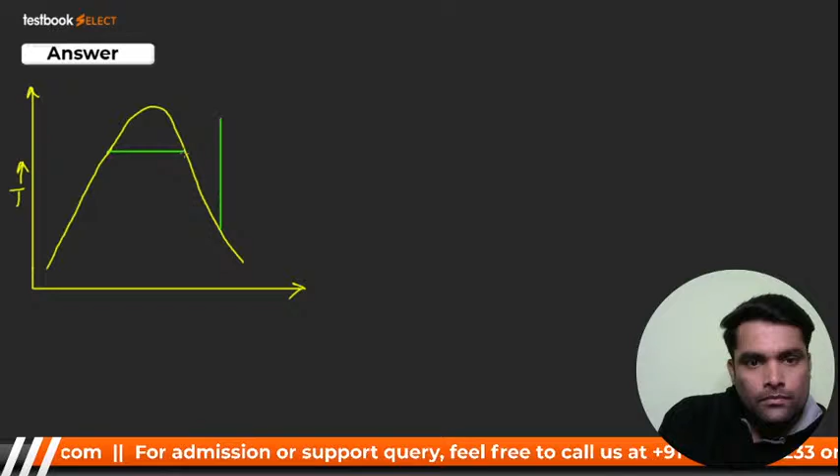And this should be TS diagram. ये TS diagram होगा. One, two, three, four. That is anti-clockwise cycle. Now they are asking about h2. What should be the h2? So my dear, see.

You know that S1 is equal to S2 as it is isentropic. ये तो पक्का पता है S1 is equal to S2 हो जाएगा. And that is nothing but what, my dear? It is how much? 1.7841, right?

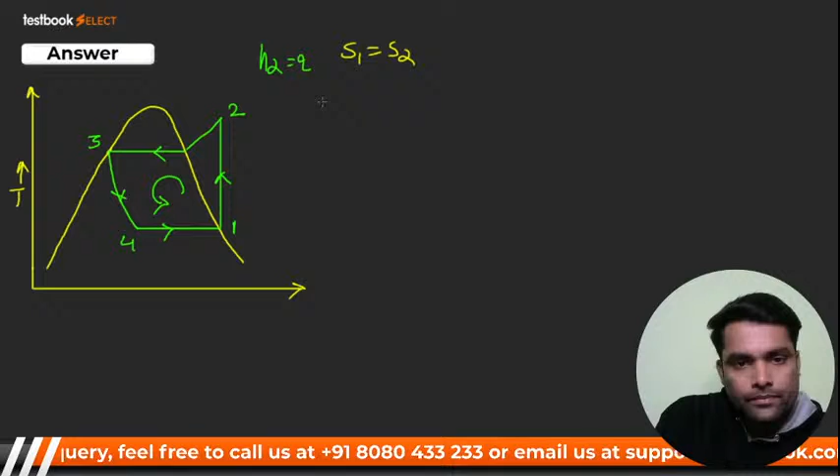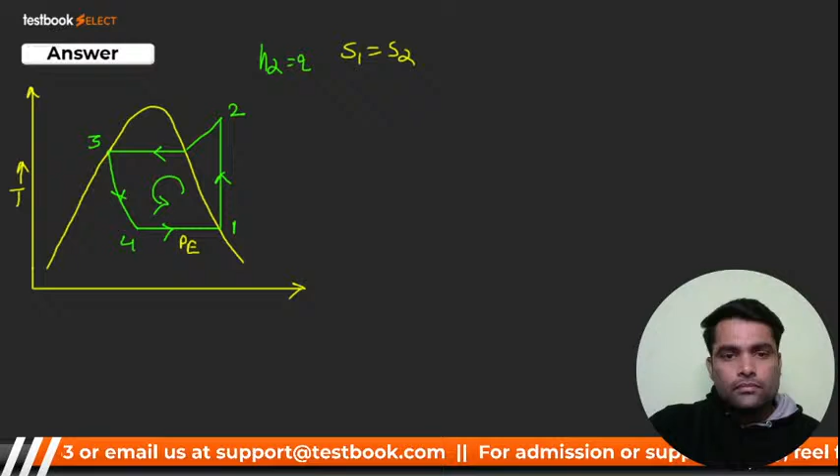S1 is equal to S2, right? So now this is evaporator pressure. Let me check whether the properties are given or not. At -20, S1, that means SF... 0.9139 is given, right? But look at one thing here, you can see here, my dear. I can also write this S1 is equal to S2. That is what, my dear? 1.7841.

And it should be CP ln T2 by TA, right? CP ln T2 by TA. Right, bacha party? Now what is SA? SA is nothing but SG at condenser pressure. See, my condenser pressure, sorry, condenser temperature 25. SG, so it should be 1.7183. So what is your SA? 1.7183 kilojoule per kg Kelvin. Right? I hope you got it. Bacha party, are things making sense? Very good. Now I can calculate.

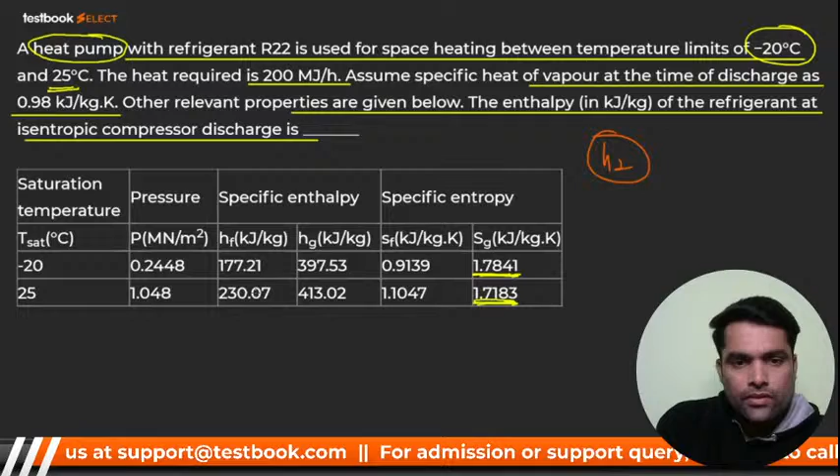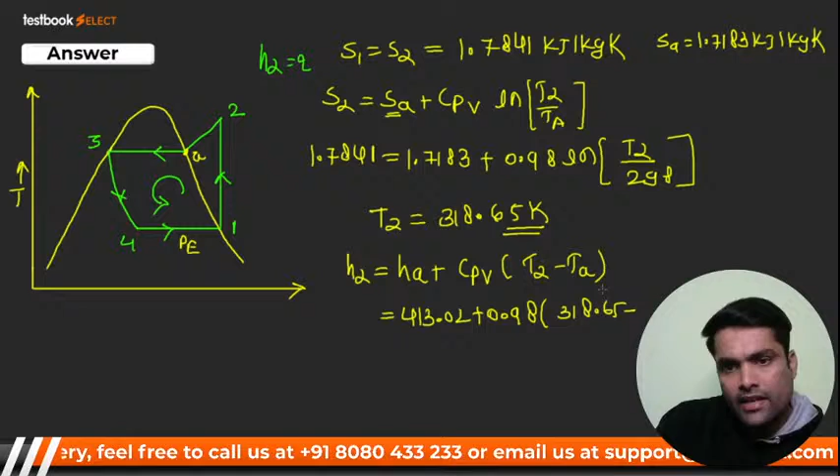HA is nothing but HG, and that is 413.02, right? So it is 413.02 plus 0.98 times T2, 318.65, minus TA, that is 298. Right, my dear? Now tell me the answer. It is 433.28 kilojoule per kg. And what did they ask in the question? They have asked the enthalpy of the refrigerant at the exit of the compressor, or isentropic compressor discharge, that is H2, and we have found H2, right? So this will be your required answer, my dear.

Okay, so guys, this is all from my side. Today we have finished set number 1 for RAC. Tomorrow we are going to continue RAC, and after that, my dear, we'll begin IC engine. Okay, IC engine or power plant.